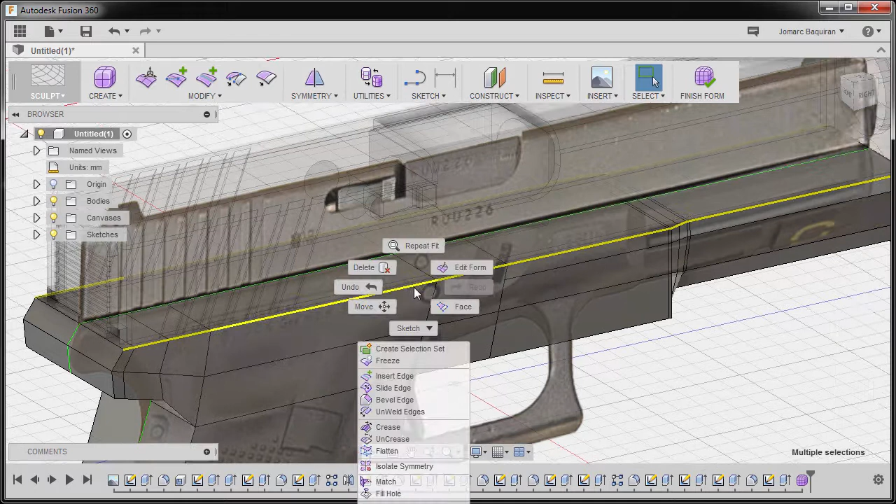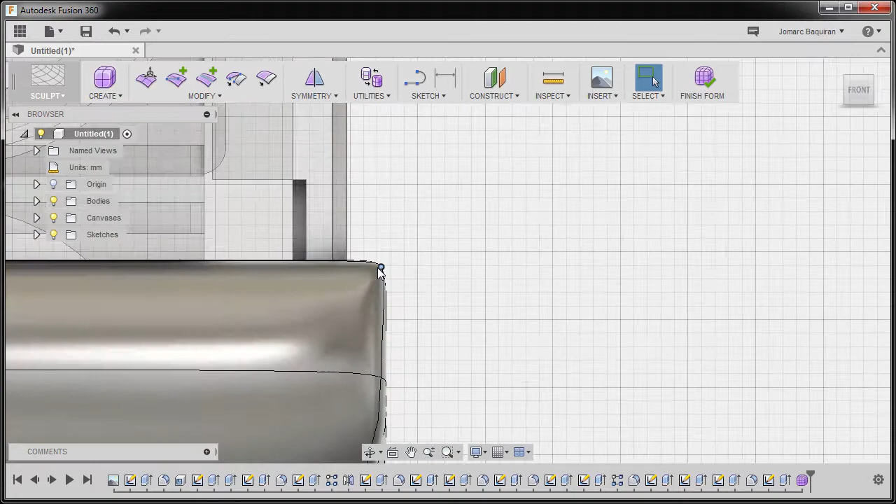Moving our slider, I'm going to key in negative 0.05 and hit OK. Going back to smooth mode to inspect, then going to front view.

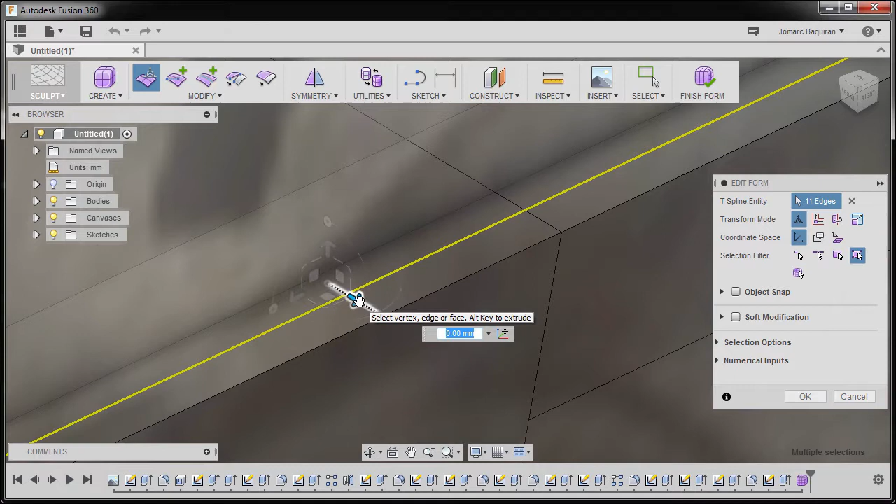If you want to add further tension, you can always double click this edge. I'm going to go to box mode, select edit form, and move our edge closer, hitting OK and inspecting the sharpness of our corner.

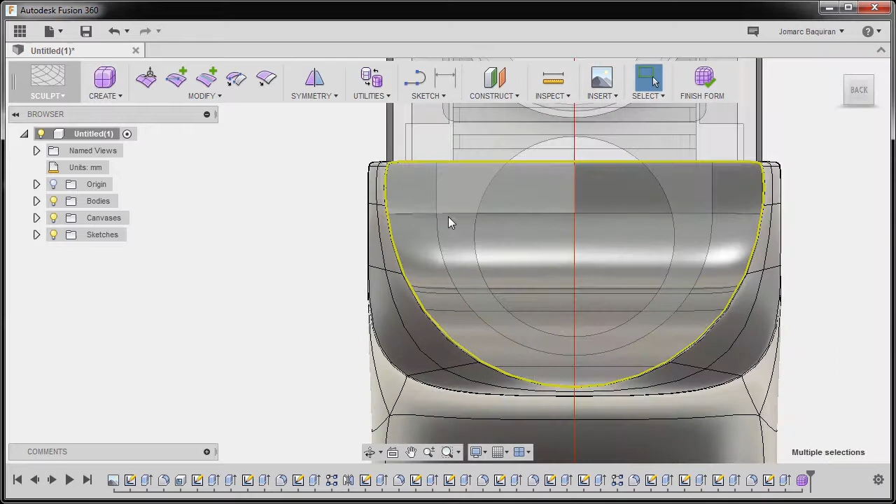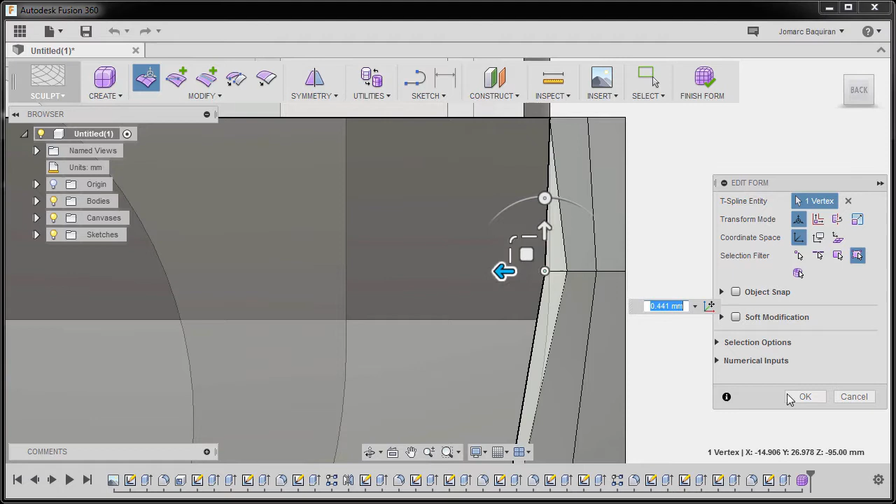So now I can double click this edge, going to back view. Now in box mode, I'd like our vertex to be positioned inside, going in here. I'm gonna reselect this vertex, right click, edit form, and because we are in symmetry mode, I'm gonna move this one up to here, hitting OK.

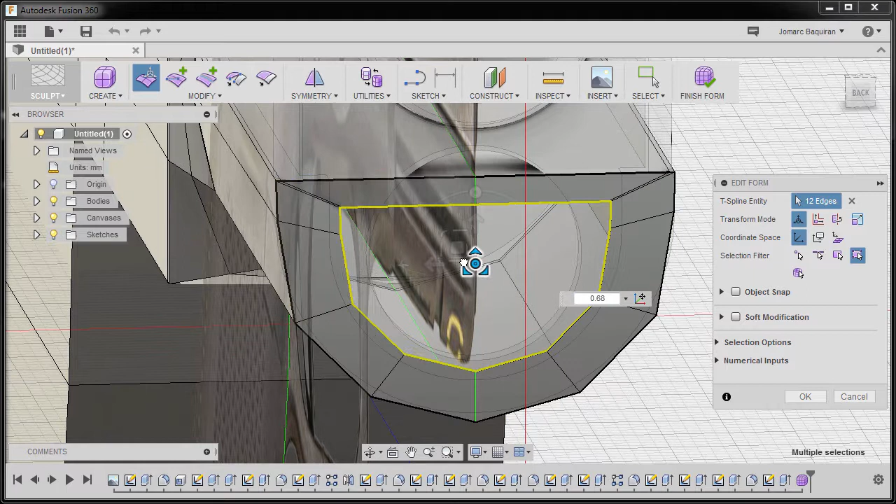Once more, reselecting our edges by double clicking, right click, edit form, and selecting this handle. I'm going to hit Control and Alt, selecting this handle and drag. Next, release and hitting Control Alt once more and keying in 0 on this dialog, hitting enter.

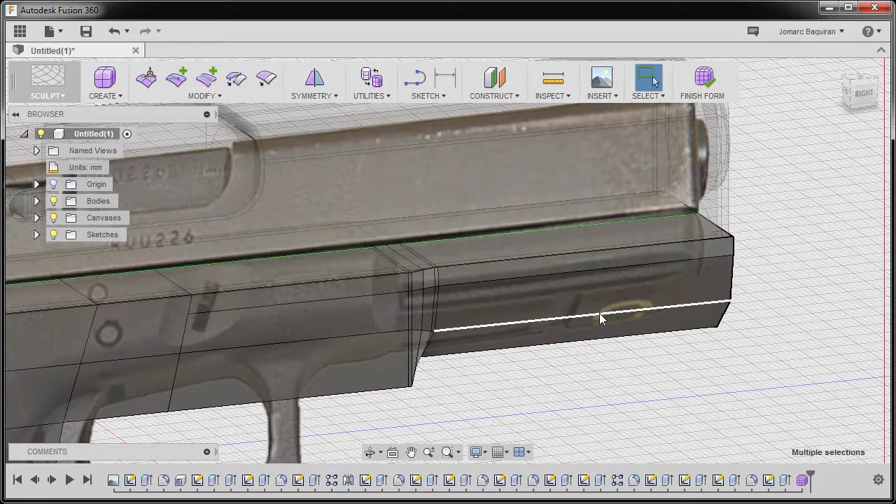Inspecting our model and going to smooth mode. Turning off the visibility of our canvas. Going to back view and inspecting. So model looking good.

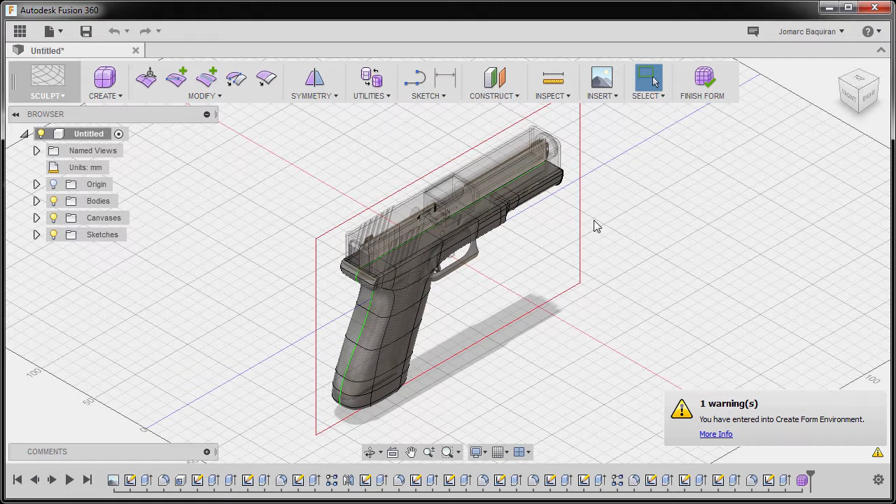Now before we go to finish form, let's add an additional detail at the back of our frame. Gonna go to box mode, control left click this faces, right click, selecting edit form.

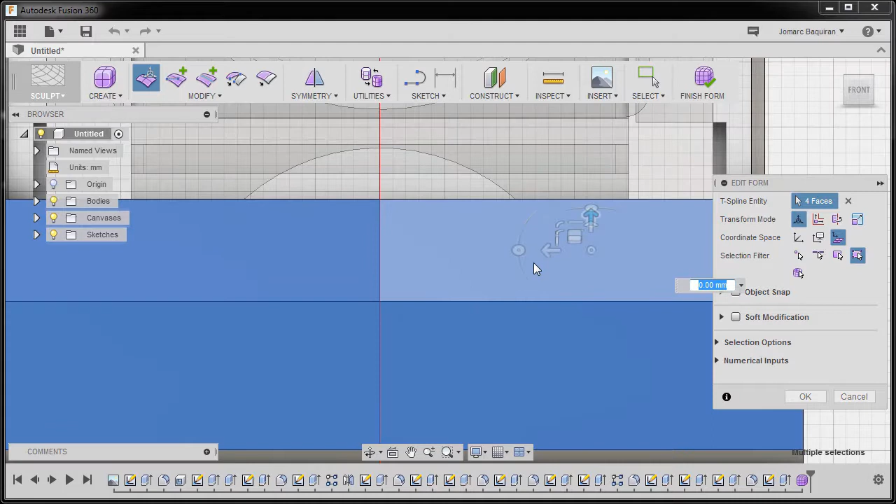Gonna go to local coordinate space, going to front view, rotating and selecting this handle. I'm gonna hold Alt to add an additional face and hitting OK.

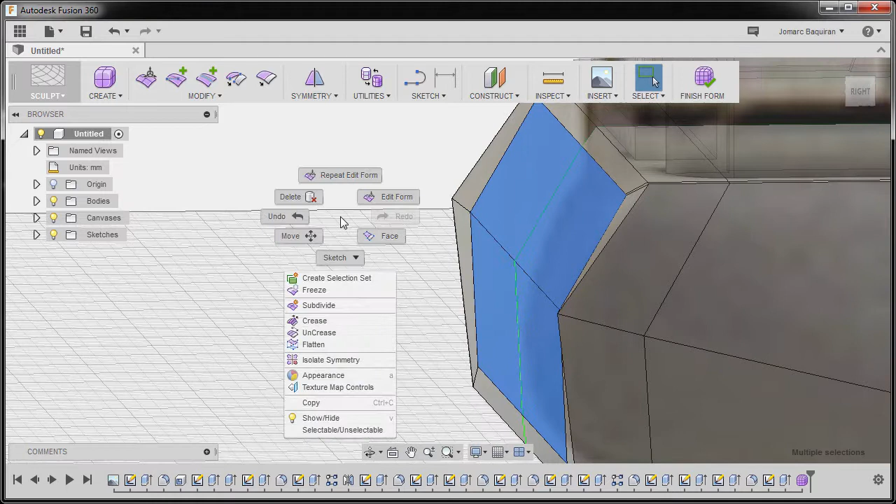So inspecting, our line is not fully aligned. So what I can do, I can go back to edit form, go to selection filter, selecting vertex and coordinate space to world space, selecting these vertices, control left click this one and this one, going to right view.

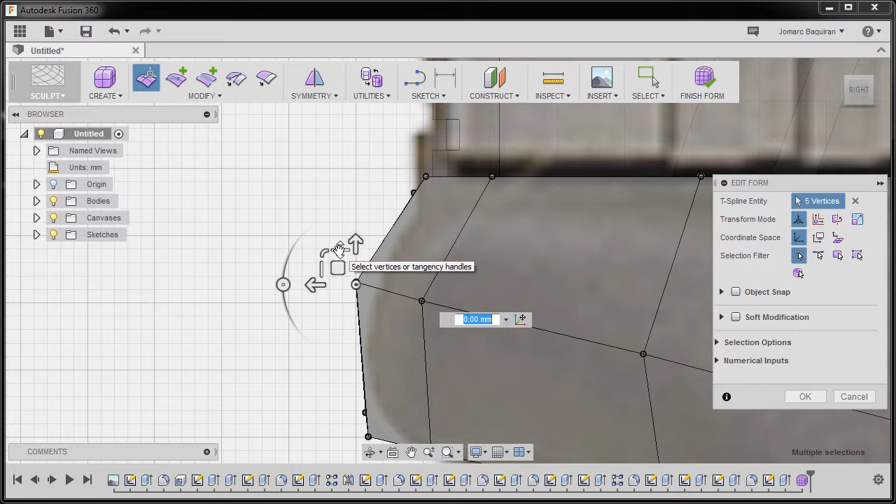I'm gonna grab our vertical scale handle, so this one for vertical, and key in 0. Next, going to grab our horizontal scale handle and move this one down. I'm gonna key in 0. And inspecting, so looking good.

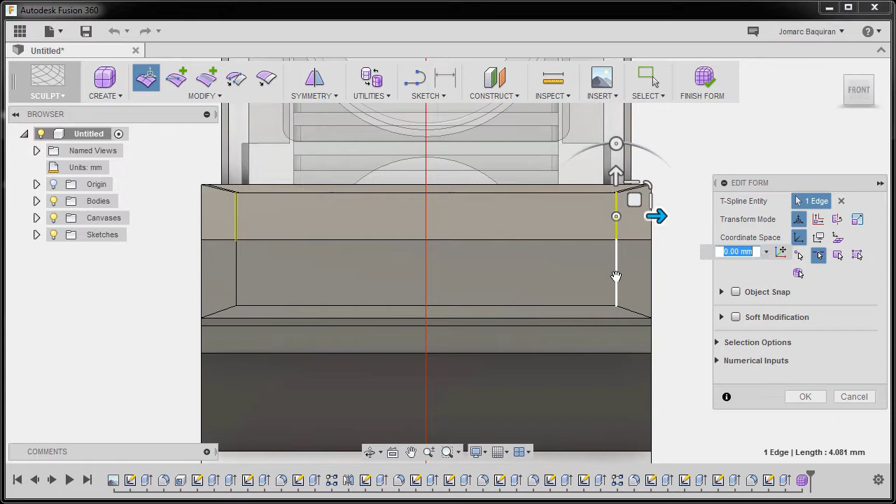Selecting these edges, going to front view, right click, selecting edit form, going to edge mode, selecting this one, and dragging this to the right. Hitting OK, and going back to smooth mode. So model looks better.

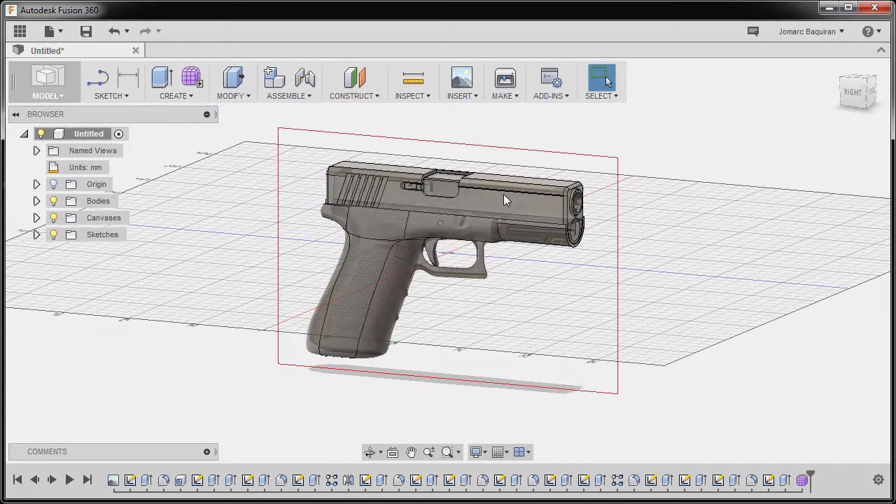And now I can hit finish form. I'm gonna turn off the visibility of our canvas, and our reference body 9. Awesome.